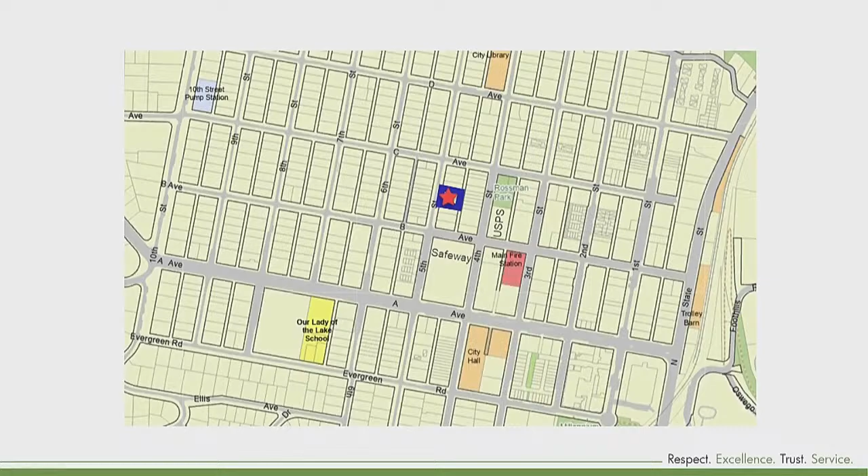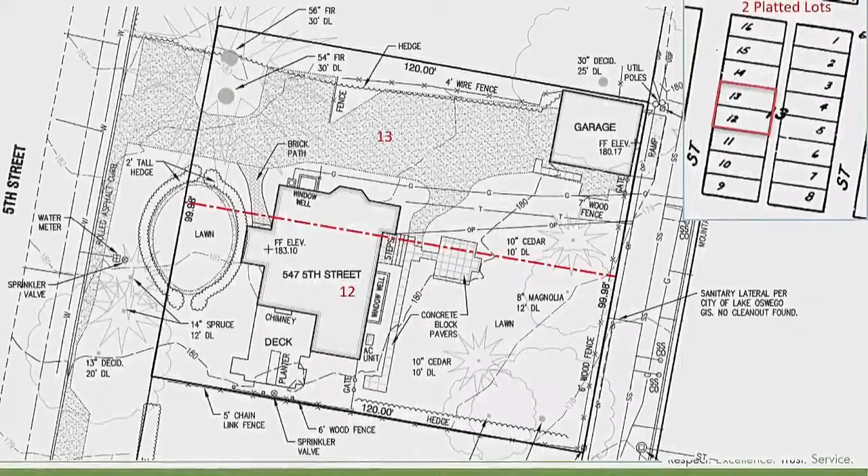So this site has 4 parts of our land use application proposed tonight, and I'm going to go through each of these 4 components in order. The very first thing to know about this site is that it actually looks like one property when you walk by the site today. It's actually platted as 2 lots back in 1892, 1893, when that whole area was first platted. So this is lots 12 and 13 with a dashed line running through the existing home on the site.

So the first thing we're going to talk about is a lot line adjustment. And that proposal takes that dashed line that goes through the middle of the site and moves it to where that solid line you can see here. This is the adjusted property line to curve around the existing house and carve out a new lot back here for development, as opposed to having kind of a piece that you can't really do anything with over here.

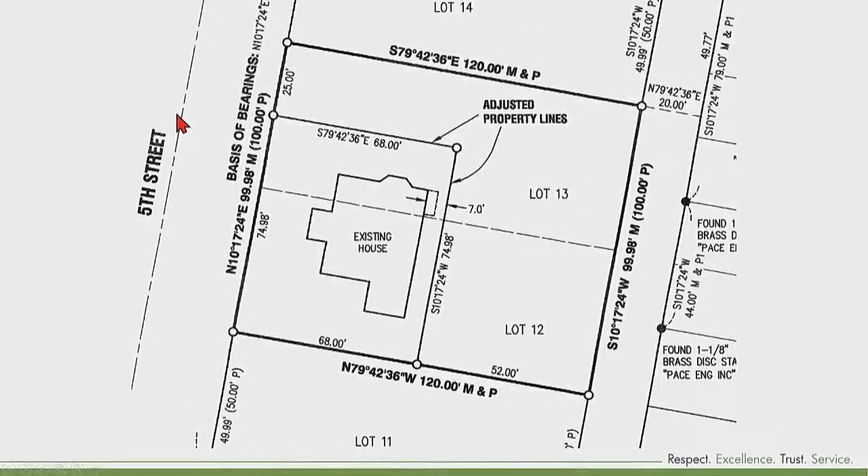So the lot line adjustment does meet the minimum lot sizes for the zone, the dimensional standards, except that I will discuss a variance request for the existing house for the rear yard setback, and we'll talk about that in a minute. So the lot line adjustment meets all of the minimum lot size, the density requirements, things like that.

Lot line adjustment meets the criteria for approval. Staff recommends approval. Our next step is going to be looking at the adjusted lot and the proposed quadplex.

I've got the adjusted lot boundaries highlighted in orange here. It's a little bit of a funny shape, but the main buildable area is going to be behind the existing structure, closer to the public alley.

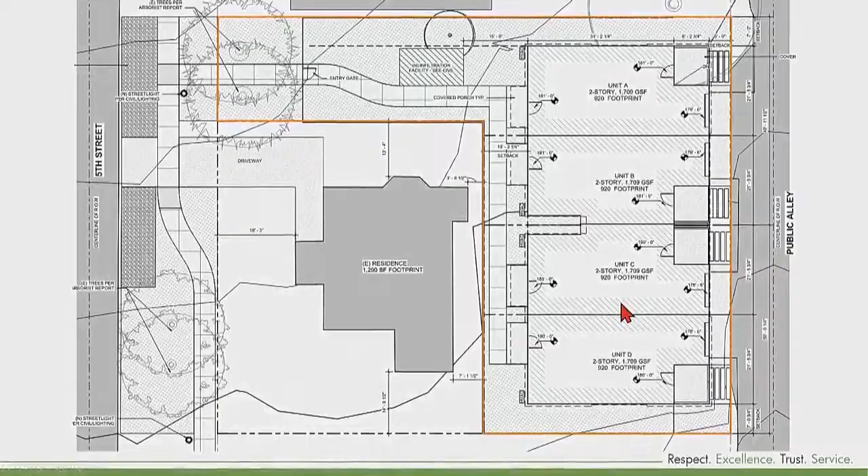This quadplex meets all of those setbacks, height limitations, and maximum lot coverage for this site, except there's also a variance request to the rear yard setback for this property. I'll talk about both of those design variances together in just a minute. But this quadplex is meeting all of its dimensional requirements, including massing, size, that kind of thing.

But in the DRDD, we also have very specific requirements for aesthetics, trying to make sure that the project matches a Lake Oswego style. And so this proposal is an arts and crafts style.

The elements of the arts and crafts style you can see on the proposed quadplex are steeply pitched gable roofs, multi-paned windows, mixed siding materials including brick, which is required to be the majority of the ground floor—it needs to be a masonry or stone type of siding down there. So we've got that brick siding on the ground floor as required in this overlay.

We've also got a combination of shingle and horizontal siding and half timbering on the front entry porches. These elements all add up to a design that complies with the applicable DRDD style and aesthetic standards that are required. So staff does recommend approval of this DR permit for the quadplex, since it complies with all of those standards.

Now getting into the proposed design variances. We have two different design variances. One is to reduce the rear setback for the existing dwelling, for that lot line adjustment to carve out a second buildable lot.

This proposal is a bit of a variable setback reduction. At one point, it's 8 feet wide on the existing structure, that's only 3.7 feet to the new property line. The whole rest of the structure length is going to be 7 feet from that new property line.

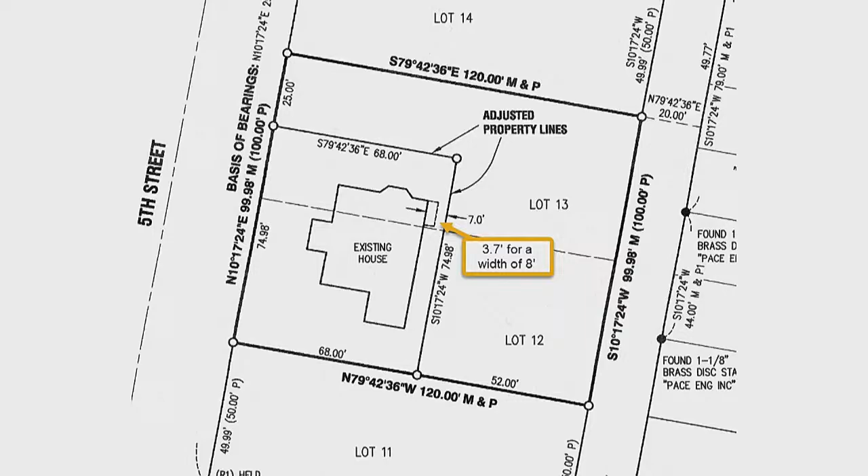This is a proposal to keep the existing walls of the existing dwelling without knocking any walls down. This doesn't approve any future development on the site to be located at this location. So if the existing house was torn down, a new house was proposed, or if an addition was proposed, it would need to meet the 20-foot rear yard setback for a detached single-family structure, or it would have to apply for another variance. So this isn't giving blanket approval, it's just approving what is currently on the site so that house can remain intact without any modifications.

For the quadplex that's proposed, there is a request to reduce the 10-foot rear yard setback. It's a different setback for a single-family house versus a quadplex in the R2 zone, so that's the reason they're two different setbacks. The quadplex would have a 10-foot rear yard setback, but in this case the applicant is requesting a 5-foot rear yard setback.

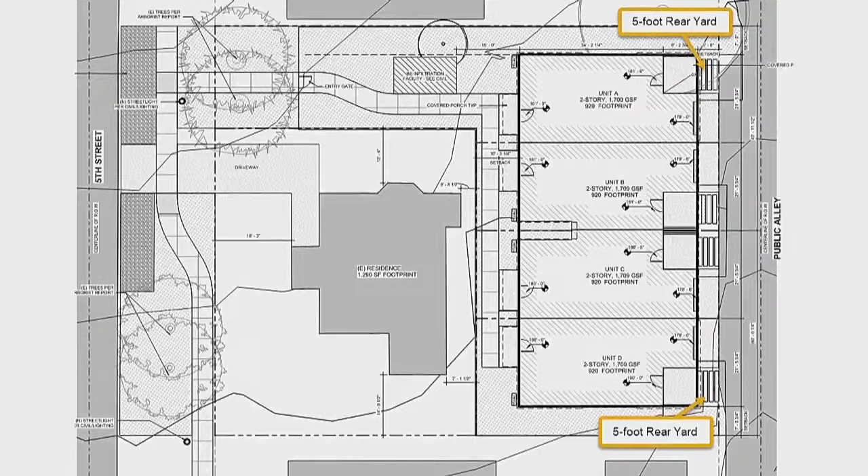Let's look at the criteria that we judge these requests by. The first criteria has two routes to approval. One route is looking at physical circumstances of the site—if following the standard as stated in the code, meeting those setbacks, is not practicable due to the physical characteristics of the site or the existing structure. The other is if an alternative design will better accomplish the purposes, goals, or objectives of the base district and any adopted plan or overlay for the applicable property.

In this case, the applicant shows compliance with both of these criteria. For the physical circumstances, the design variances requested to both rear yard setbacks involve retaining 54-inch and 56-inch Douglas fir trees that you can see on the left side of the screen, and retaining the existing structure.

So those are both existing physical circumstances on the site, and they're also better achieving the intents and purposes of the neighborhood plan, because the First Addition neighborhood plan encourages retaining mature trees and retaining the existing housing stock as much as possible. It's also in keeping with the R2 zone purposes by allowing development of residential use behind this existing structure. So it's really hitting both the neighborhood plan and the R2 zone purposes, as well as retaining existing mature Douglas fir trees and the existing house on the lot.

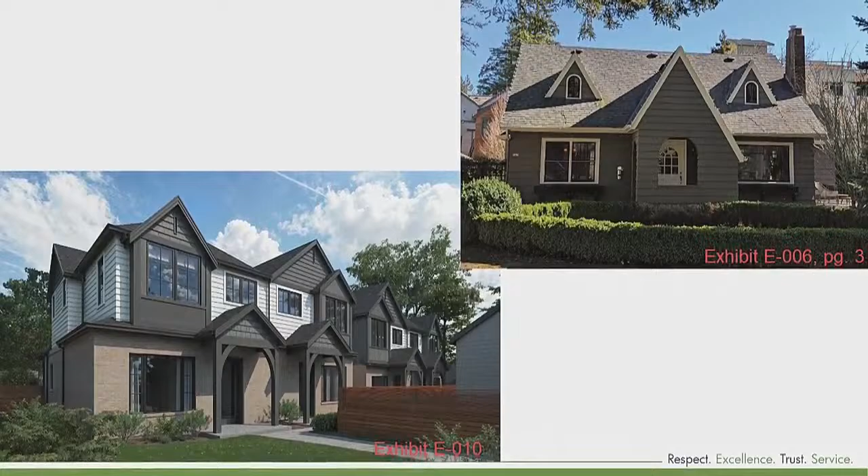The existing structure is a 1940s dwelling, and I think we're all familiar with the construction of older homes. Staff does find that both structures meet that high quality of appearance, detailing, and materials.

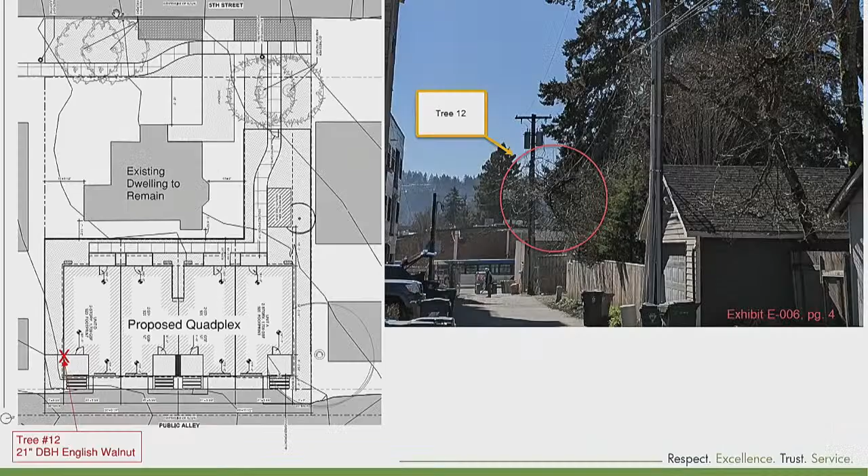And the very last piece of this 4-part application is the tree removal. There is a request to remove a 21-inch diameter at breast height English walnut tree. Just to make sure you're paying attention, this map is a little confusing—north is to the right, so 5th Street's at the top and the alley is at the back. The tree proposed for removal is closer to the alley, located within the footprint of the proposed quadplex.

This tree has been heavily topped in the past, with very severe pruning due to the overhead utility lines running along the alley. A couple weeks ago, when I took this photo for the staff report, you could hardly even see it. It's not very visible, and it's not visible from 5th Street since it's actually blocked by the existing house that's going to remain. So this tree is barely visible from off-site.

When we look at a significant tree under our tree code, which this commission is familiar with, this tree proposed for removal does not meet the criteria to be considered a significant tree, nor does its removal lead to significant negative impacts under the other criteria in LOC 55.02.080. So staff does find that the criteria for removal are met with this proposal.

There is a mitigation tree proposed—you can see it located here on this plan. It's proposed to be a Persian ironwood, which would meet our requirements. So staff recommends approval; all 4 components of the application do meet the applicable criteria.

Here's that site plan again that Ellen showed, and it shows the 2 trees up front, 1 and 2, to be retained, the existing house to be retained. We are retaining 2 of the 3 existing street trees as well; 1 has to be removed, it's down here for water meters to go in. And then the new quadplex with the mitigation tree, like Ellen noted.

As an architect, I'm always concerned about fire resistance measures, especially since the existing house and the new development are so close together. I was wondering how far the rear porch protrudes toward the new property line on the east side. Do you know how far the overhangs are? About 7 feet. So we would still have building separation for fire, being more than 6 feet between the structures.

Were there any solar design standards you needed to meet? I don't think solar access standards were applicable here - those apply to single family, not this quadplex development type. I think that's correct in the R2 zone, but if you give us a minute, we will look that up.

That's all I had. Okay, other questions?

Is there a fence on the property line between the quadplex and the house? Not currently, but here, I'll show you - you can see this darker line, that's probably a proposed fence, and you can see it in the renderings. It continues and wraps down to the south.

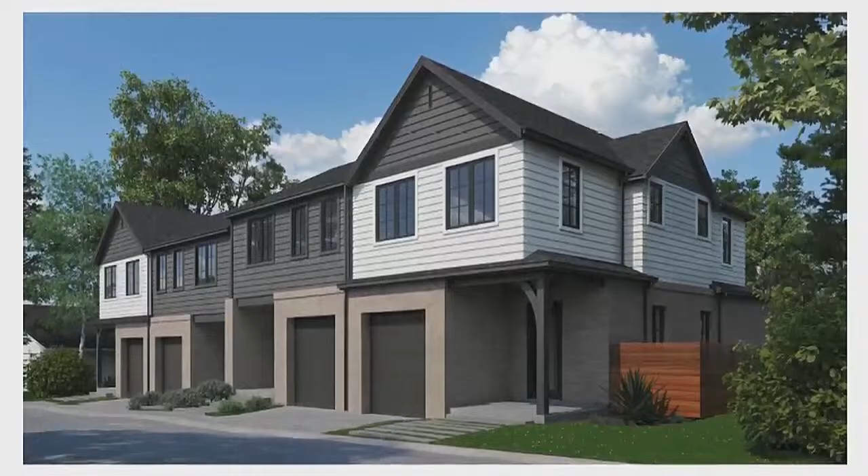Going back to the site plan - you mentioned an issue in the alleyways where people park. In this case, between the walkways or stairs coming down from the back of the quads, there's a driveway and a garage. What we find in Portland is the standard is 5 feet or 18 feet, because at 5 feet people don't try to park a car in front of the garage since it's too short and they know it'll stick out. At 10 feet, they'll try to park there, but most cars don't fit in 10 feet.

The area where the grass is that looks like it may have concrete strips in it - is that the walkway to the back door? Is it concrete?

I'm just looking at the long-term approach here. It seems like a homeowner might say, well, I can park behind my garage door and I can park on that concrete parallel to the road. I wasn't going that far, but I hope the quadplex takes that into consideration with the homeowners so we don't end up in that situation.

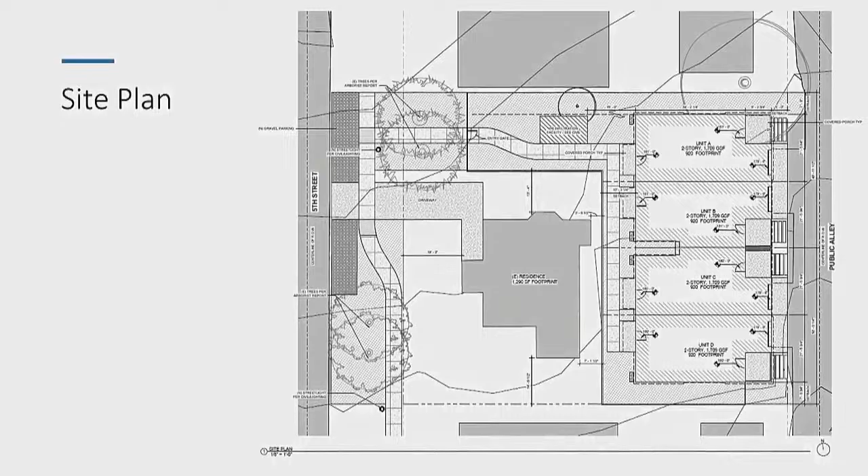Sorry to piggyback on that, Senior Planner Davis did say you could consider a condition of approval. What she was noting was, obviously a lot of times fences are voluntary. If you wanted to consider an imposition to condition the fence, I think what we're hearing from the public is a sight-obscuring fence, which is a particular sort of construction, would be considered.

Yeah, that was why I asked the question. Got it, thank you.

Any more questions? Hearing none, I think we'll move into the non-applicant testimonies or speaking. We have one speaking in support. So the order of this will be those in favor, then those in opposition, and finally those neither for or against.

So first off, we will have in support Carol Ockert. Apologies if I butchered that. Please introduce yourself, and then you have 5 minutes.

I'm speaking as the land use liaison for First Addition/Forest Hills Neighborhood Association, so I don't know if you want to, I mean, I'm not going to be that long, but are you limiting that to 5 or whatever? Yeah, we have that changed to 10. Okay, thanks, Carol, appreciate it. All right, but either way, I won't be long. That's fine. So thank you very much.

Starting by saying the treed double lot, 547 Fifth, with the gracious 1940s home, is an eye stopper for the street. It's an iconic First Addition look. And the developer has come up with a very creative development plan for apportioning the lot, saving the trees, saving an iconic home, and adding density to an area of our neighborhood zoned for high density for many years.